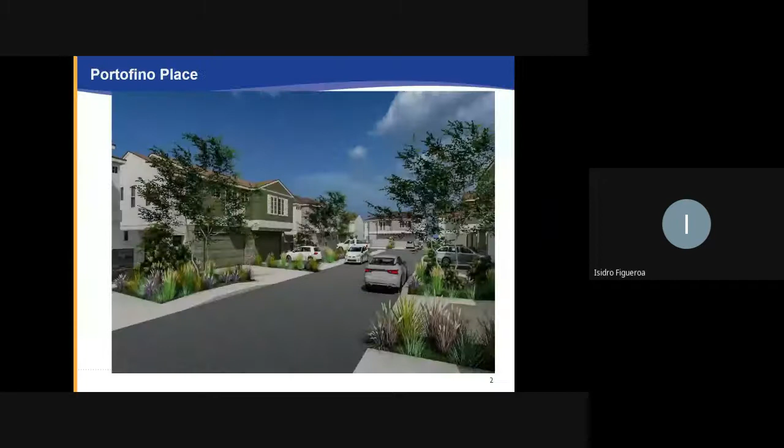The project requires approval of a general plan amendment to change the land use designation of the project site from Business Research Park to Residential Medium. The RM land use designation allows density up to 12 to 18 units per acre.

The project is seeking approval of a zone change to change the zoning of the project site from Business Research Park to Multiple Family R2. The R2 zoning allows condominium development with a tentative subdivision map and special use permit approval.

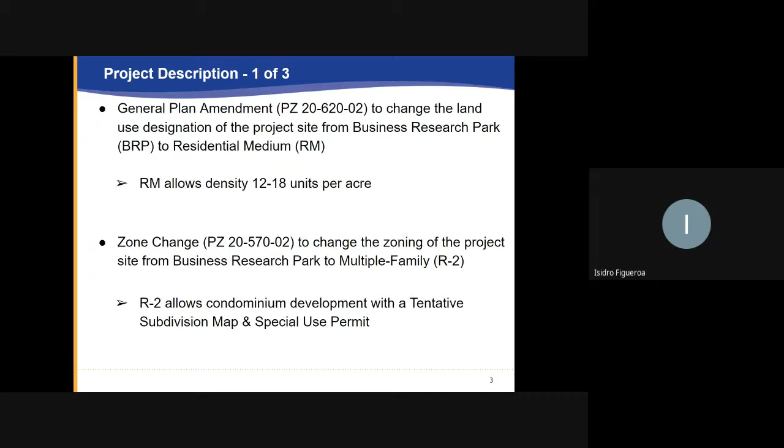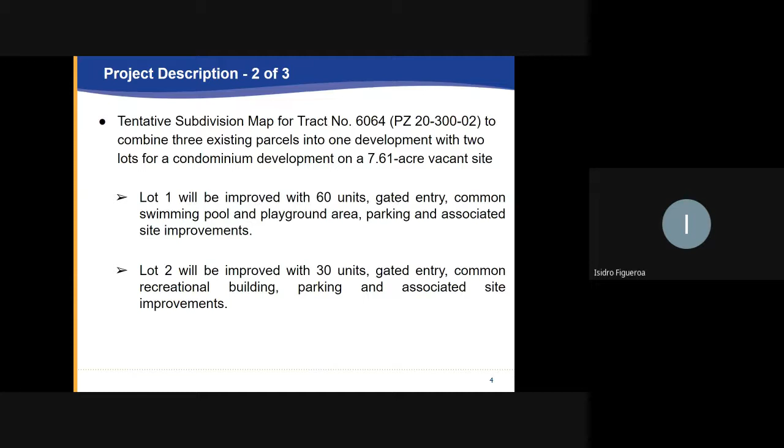The project is seeking approval of a tentative subdivision map for tract number 6064 to combine three existing parcels into one development with two lots for a condominium development on a 7.61 acre site. Lot 1 will be improved with 60 units, gated entry, common swimming pool and playground area, parking, and associated site improvements. Lot 2 will be improved with 30 units, gated entry, common recreational building, parking, and associated site improvements.

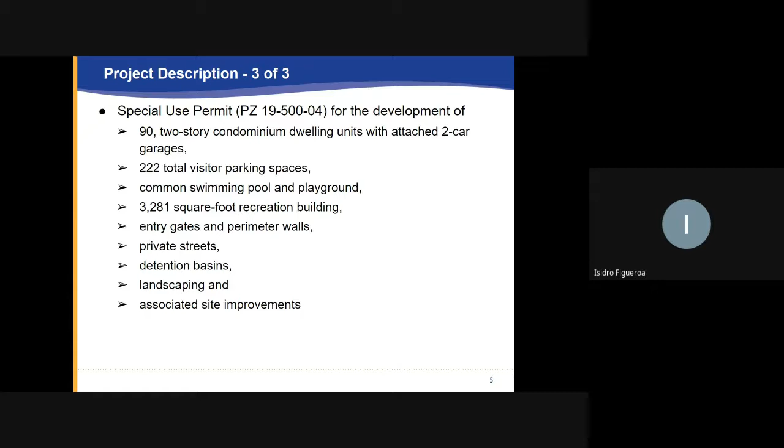The project is seeking approval of a special use permit for the development of 90 two-story condominium dwelling units with attached two-car garages, 222 visitor parking spaces, common swimming pool and playground areas, a 3,281 square foot recreational building, entry gates, private streets, landscaping, detention basins, and associated site improvements.

The project site is located on the south side of 5th Street at the intersection of Portofino Place within the Sea View Estates neighborhood. The Oxnard Airport and industrial uses are located to the north of the project site. Residential subdivisions are located to the south. A car wash is located to the west, and an elementary school is located to the east.

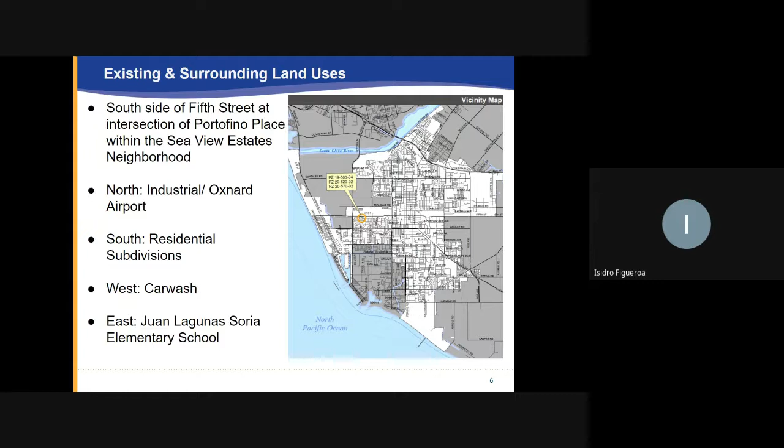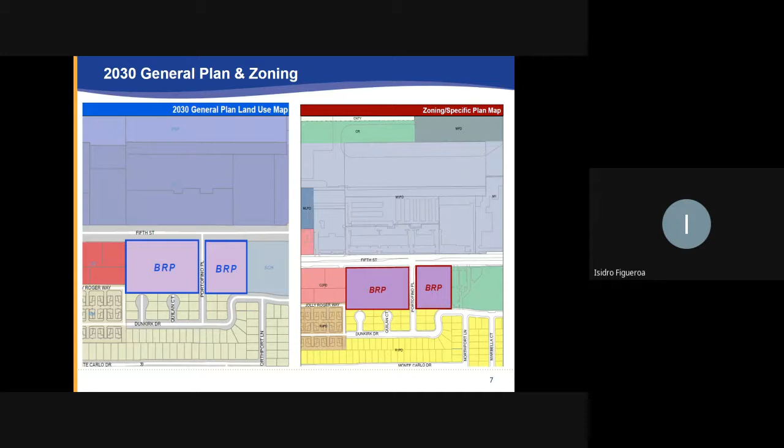The existing 2030 general plan land use designation for the project site is Business Research Park, and the existing zoning of the project site is also Business Research Park.

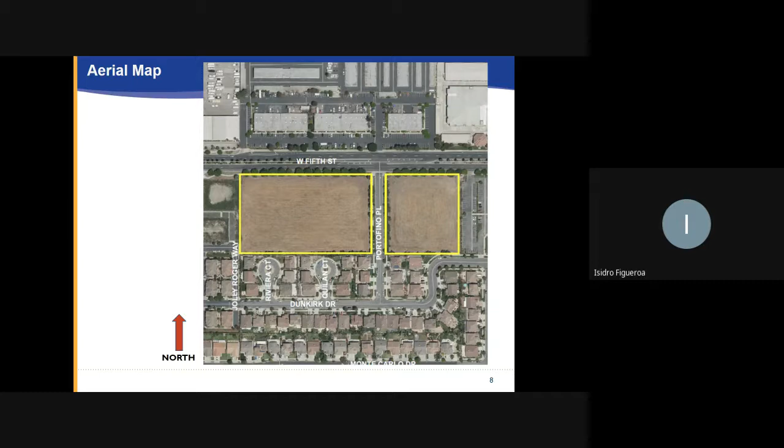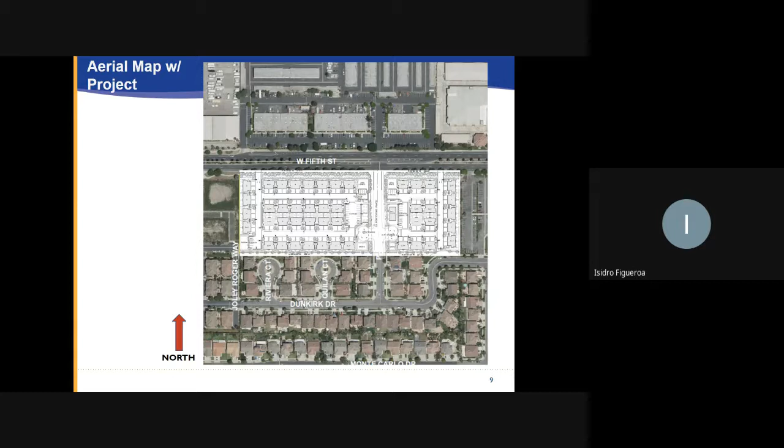Providing some background, the project site was part of a larger 17-acre project that has been developed in phases. In 2004, the council approved the general plan amendment and zone change to designate 7.885 acres of the 17-acre project as residential, located north and directly adjacent to the project site. The project site was to be changed to be inclusive of three parcels zoned Commercial General through a separate application, but the applicant did not proceed and the site remained BRP.

A mitigated negative declaration was found to be appropriate and adopted by the City Council. The adopted MND found the project not to have a significant impact to the environment if the mitigation measures described in the MND were incorporated into the project.

On March 19, 2019, the City Council reviewed a pre-application for the project site that includes all of the components this project is requesting. The City Council reviewed and made general comments on the pre-application. The Council found the general plan amendment and zone change request for a residential project generally acceptable, and preferred affordable housing units built on site.

The Council discussed the need to update the affordable housing in-lieu fee payment because of the low payment amount. In general, the Council did not prefer an affordable housing in-lieu fee payment option for residential projects until the affordable housing in-lieu fee payment was updated.

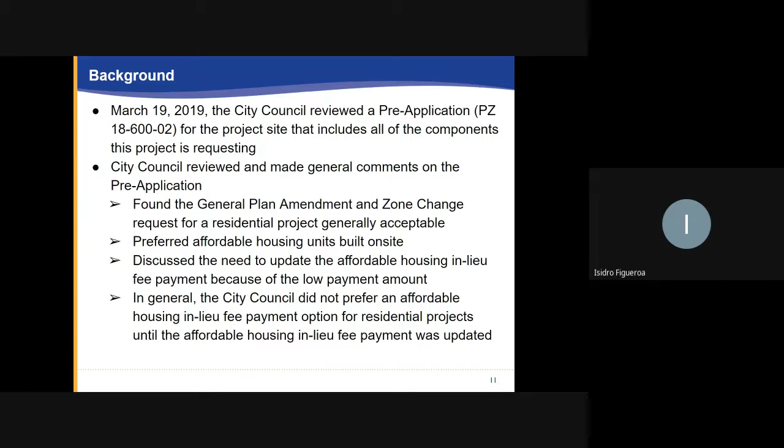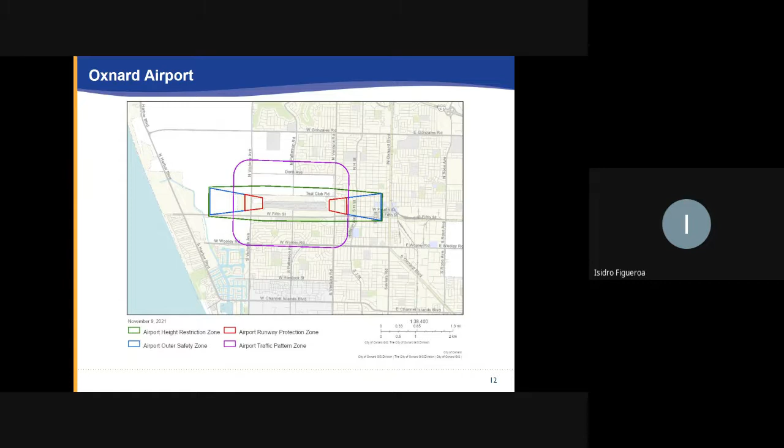The project site is located within the Oxnard Airport sphere of influence and height restriction zone. Since the project site is located within the Oxnard Airport sphere of influence and restrictive height zone, it limits the structural coverage to 25% and requires that total height of buildings not exceed 25 feet. The project is designed not to exceed the 25% allowable site coverage and 25 feet maximum height limit.

The project is required to implement mitigation measures G2 and K1 of the addendum to avoid conflicts with airport compatibility requirements by providing necessary buffers as well as filing with and undergoing review by the Federal Aviation Administration.

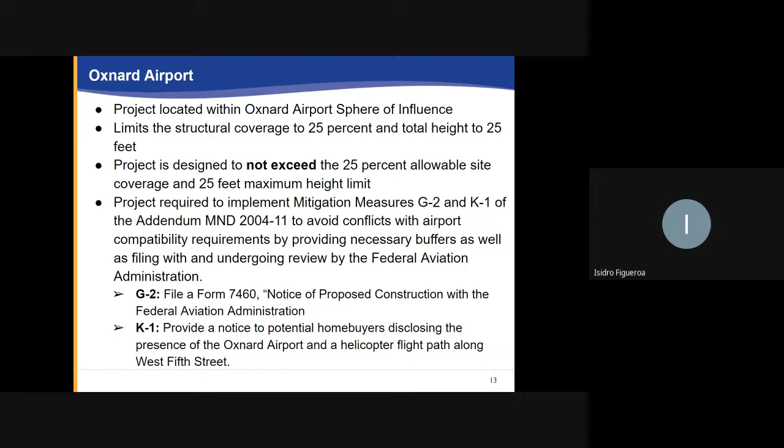The two mitigation measures are G2, file a Form 7460 Notice of Proposed Construction with the Federal Aviation Administration, and K1, providing notice to potential homebuyers disclosing the presence of the Oxnard Airport and a helicopter flight path along West Fifth Street. Both of these mitigation measures will be incorporated into the special use permit and tentative tract map resolutions.

The general plan amendment request is to change the general land use designation from business research park to residential medium to allow for a residential project.

The project site is located on Fifth Street, a designated scenic corridor, and it shall incorporate a required 30-foot landscaping buffer. The project as designed complies with the new RM land use designation.

The RM allows density of 12 to 18 units per acre. The project is proposing 12 units per acre. The project is designed to meet the 2030 general plan residential policies.

The project is designed not to exceed the 25% allowable site coverage, and structures are designed not to exceed 25 feet of height, consistent with the Oxnard Airport Sphere of Influence restrictive zone.

The project will be served by existing utilities with minimal impacts on city infrastructure and services. The amendment will not create internal inconsistencies with the 2030 general plan.

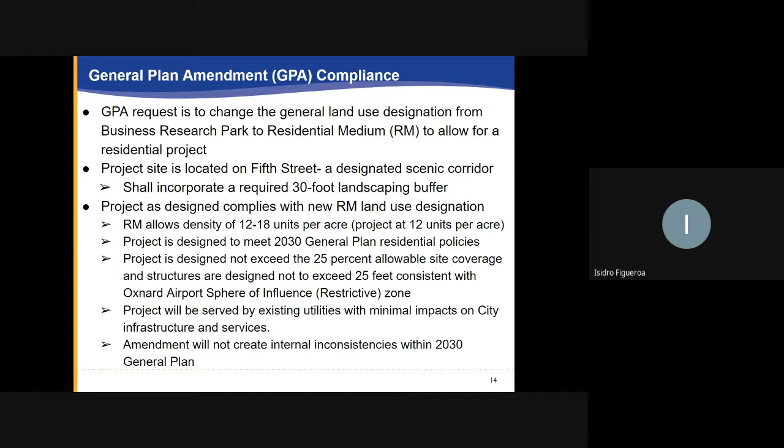The general plan amendment requests a change from business and research park to residential medium for the project site.

The project is seeking approval of a zone change, requesting changing zoning from BRP to residential multifamily for the project site, to be consistent with the general plan amendment request.

The project has been designed to meet the R2 development standards, which include providing attached two-car garages to all units.

Density allows for up to 94 units, but the project proposes 90. The project provides 222 parking spaces, although it only is required to provide 60.

The project exceeds the interior yard space requirement of 30% with 34%, which equates to 115,660 square feet. The requirement is 30%, which equates to 96,572 square feet.

All structures are designed not to exceed 2 stories and 25 feet. The project is designed to meet all required setbacks, including the 30-foot landscaping buffer required by the general plan in front of Fifth Street. The project is conditioned to provide 12 bicycle parking spaces.

The project is not required to comply with the attached dwelling unit development standards.

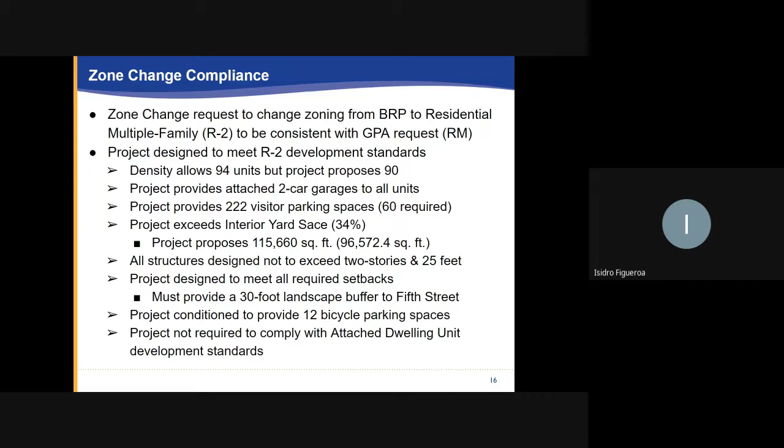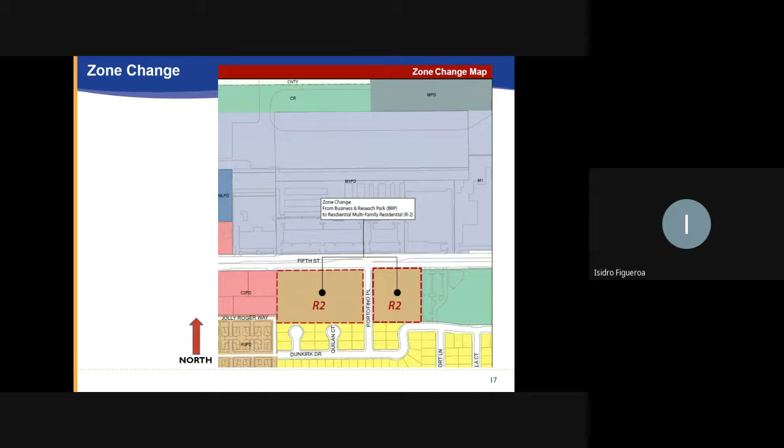The project is proposing a zone change to change the zoning of the project site from business and research park to residential multiple family residential, R2.

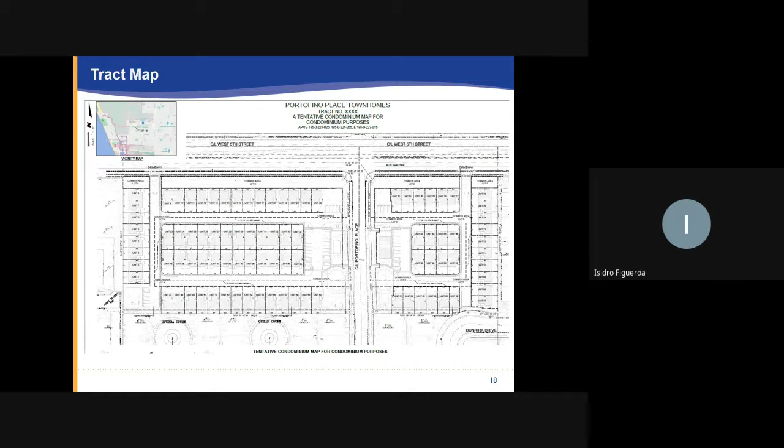The project is seeking approval of a tract map for condominium purposes and infrastructure improvements. The existing project site is bisected by Portofino Place.

The project conforms to parking requirements by providing 2-car attached garages, required for a total of 180 spaces. The project is required to provide 60 visitor parking spaces; however, the project is proposing 222 spaces.

There will be no parking allowed on the private streets, and a condition of approval is included in the special use permit resolution. The project is accessed by Fifth Street.

Each lot will have a gated entry off of Fifth Street. Each lot has a gated entry off of Portofino Place.

The addendum to MND 2004-11 analyzed vehicle miles traveled as required by the California Environmental Quality Act. In comparison, the proposed project will have significantly less VMT annually than a commercial project.

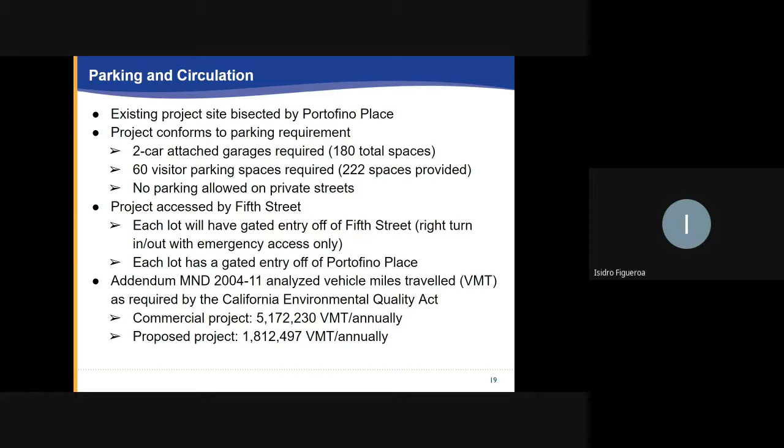The proposed project would encompass 1,812,497 VMTs versus the commercial project at 5,172,230 VMT.

Fifth Street westbound traffic would utilize the existing dedicated left turn pocket to access Portofino Place. Eastbound traffic on Fifth Street will be able to access the project site.

The project is conditioned to provide off-site improvements such as pedestrian safety enhancement along Fifth Street by retrofitting existing streetlights along the project frontage with LED lights, constructing 2 traffic calming devices on Portofino Place, and all internal drive aisles shall be designed and maintained as fire lanes for parking, regulatory, and enforcement purposes.

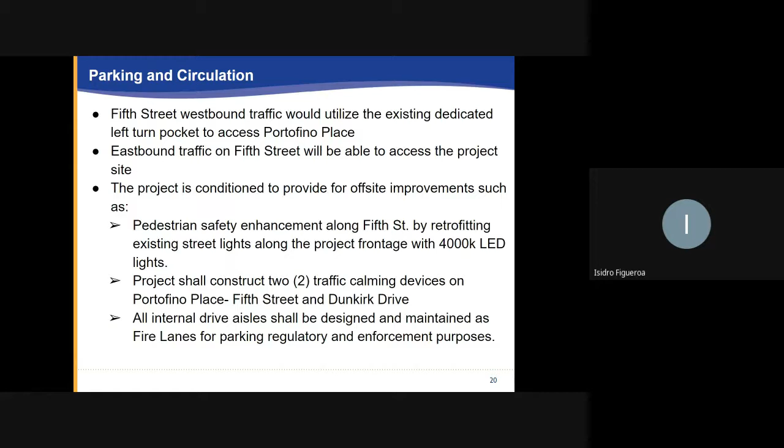The project is designed based on existing project site configuration with no request for any variances. The existing project site is bisected by Portofino Place. Access points access off of West 5th Street. Parking is all contained within lots and screened by property line, walls, and landscaping.

A 30-foot landscaping buffer required along 5th Street frontage is incorporated into the project. Architecture and landscaping is similar to surrounding communities. The project's density is similar to surrounding communities as well, and the project will be governed as a single entity by a homeowners association, and all amenities will be available to residents of both lots.

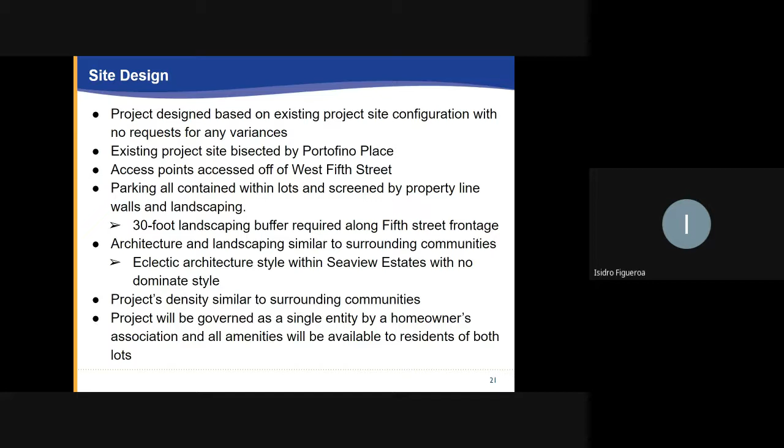Again, the project was designed based on the existing lot configuration. Two main entry points will be off of Portofino Place, and the project incorporates a 30-foot landscaping buffer fronting 5th Street.

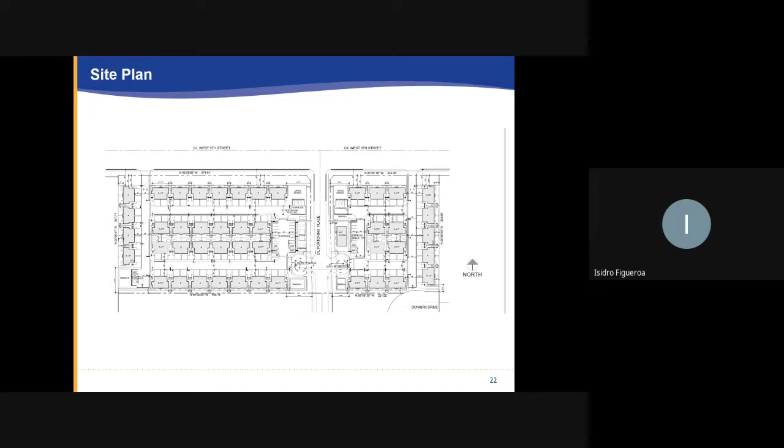The project complies with all but one of the advisory standards identified under City Council Resolution number 7658. The outdoor patio required dimensions, which are advisory, are 10 feet by 10 feet, equating to 100 square feet of land area. The project provides individual outdoor patio areas with various dimensions, with some designed under the 10 foot by 10 foot recommended by the advisory standards. However, these individual outdoor patio areas range in land area between 450 to 1,530 square feet, which exceed the 100 square foot recommended by the advisory standards.

The project has been designed to integrate other advisory standards, such as providing common areas like the common swimming pool, playground, and the 3,281 square foot recreational building, including storage contained outside of the required garage dimensions.

Minimum livable area is recommended at 1,000 square feet. However, the project proposes livable area between 1,413 to 1,476 square feet. The advisory standards recommend security, and the project has incorporated a gated community and secure entrances.

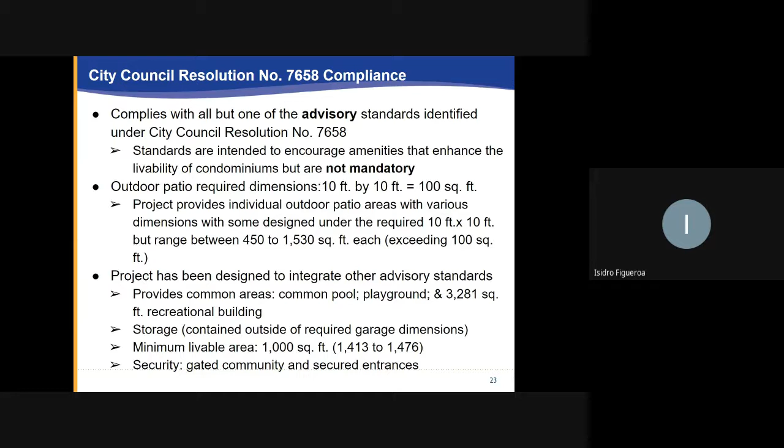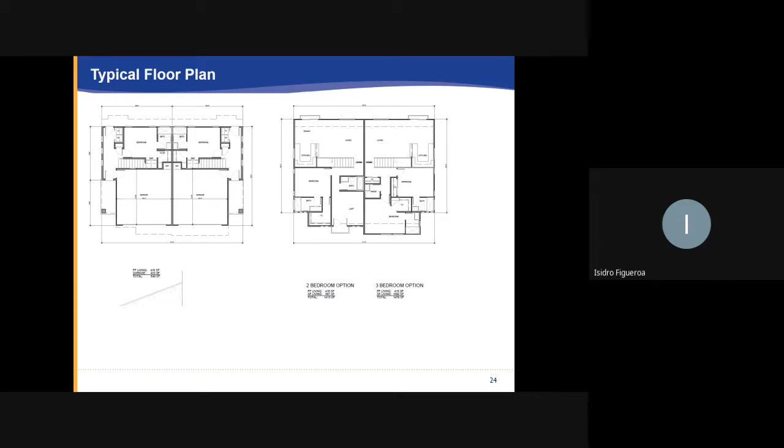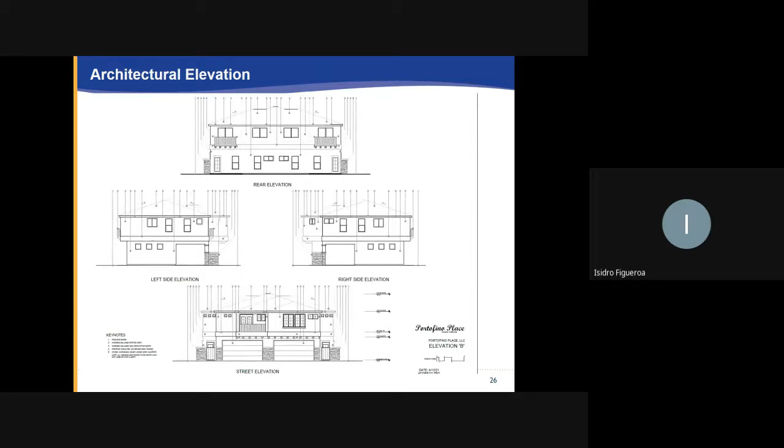The floor plan currently on display shows a typical floor plan for the project site. The project will offer 6 different unit types ranging in square footage between 1,441 and 1,508 square feet, offering options of 2 to 3 bedrooms, with architectural elevations being offered throughout the project site, which incorporate craftsman style architectural elements.

The landscaping, again, requires that the project site incorporate a 30-foot landscaping buffer along the frontage of the project site, parallel to 5th Street. That has dictated the design and placement of structures along the project site.

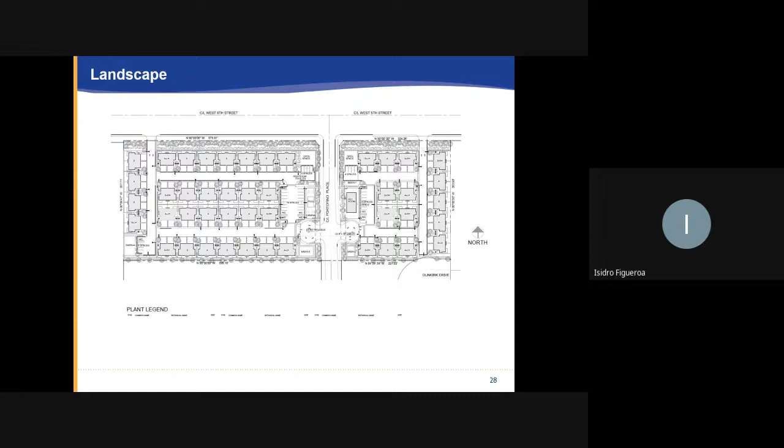The project is required to provide 30% interior yard space, which equates to 96,572 square feet. The project provides approximately 115,660 square feet. The project is not proposing to remove any of the 91 existing trees on site. The project provides an additional 152 trees.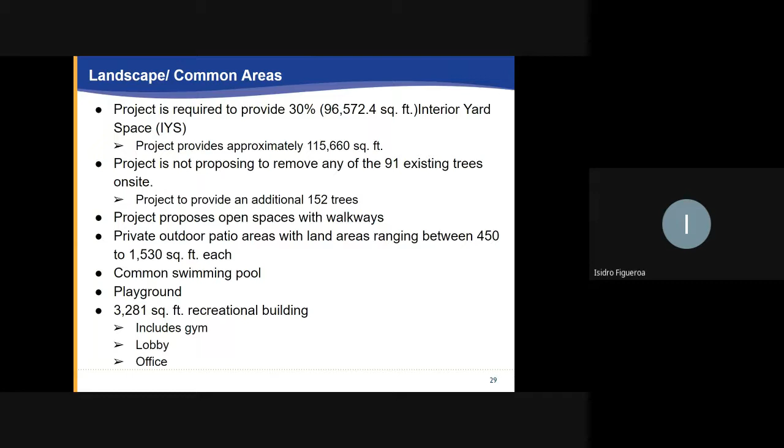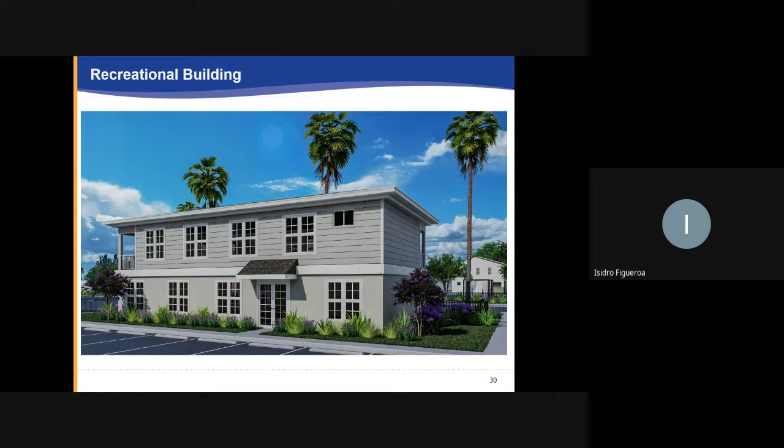The project proposes open spaces with walkways, private outdoor patio areas with land areas ranging between 450 to 1,530 square feet, common swimming pool and playground areas, and a 3,281 square foot recreational building, which includes a gym, lobby, and office. The elevation currently on display illustrates the architectural style of the recreational building, which is to complement the existing architectural style of the condominium units.

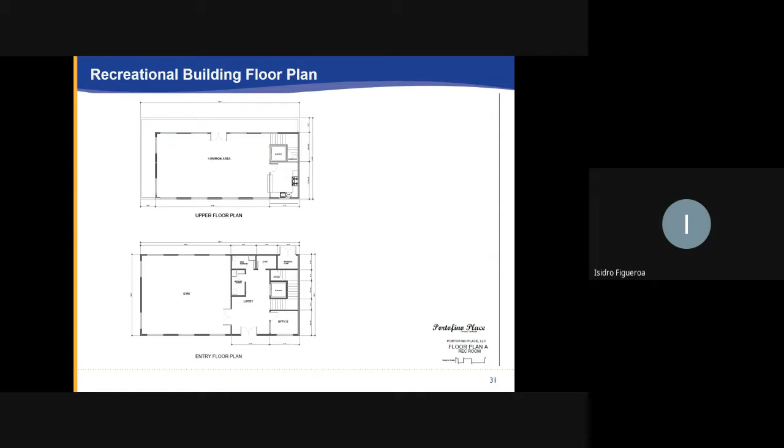In 2004, an MND was prepared to evaluate the commercial development on the project site, which required a general plan amendment, zone change, and the residential development on the adjacent 10-acre property to the south of the site. The project site was not identified in the list of hazardous and cleanup sites. The project site was found to be suitable for commercial development. The 10-acre adjoining site was found suitable for residential development.

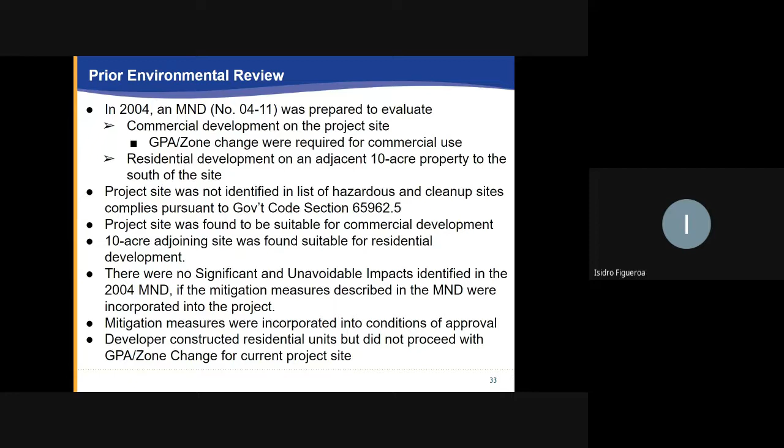There were no significant and unavoidable impacts identified in the 2004 MND if all mitigation measures described in the MND were incorporated into the project. Mitigation measures were incorporated into conditions of approval for the project. However, the developer constructed the residential units but did not proceed with the general plan amendment zone change for the current project site. An addendum to MND 2004-11 was prepared.

The addendum compares the environmental effects of the current proposed project to the effects of the original project. The residential project being considered by the Planning Commission is a less intensive use than the commercial project analyzed in the previous MND because of less traffic volume. The addendum concludes that the proposed project would not create any new significant impacts or increase the severity of the impacts beyond those identified in the previously adopted MND 2004-11.

No new significant effects identified. All mitigation measures included in adopted MND 2004-11 and the addendum to MND 2004-11 have been included as conditions of approval in the special use permit and tentative tract map resolutions.

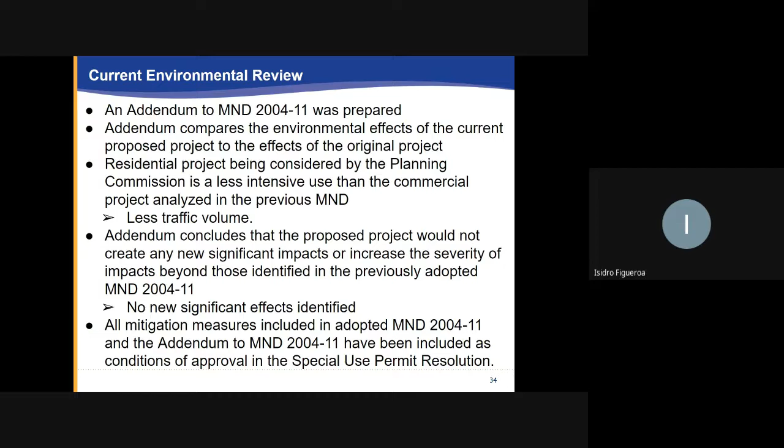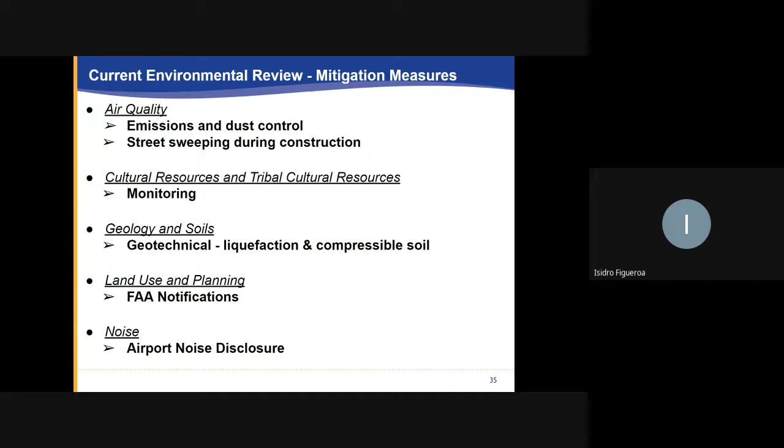The topics analyzed under the MND and addendum MND that require mitigation measures have been included on this slide for a quick summary. Air quality mitigation measures include emissions and dust control, street sweeping during construction. For cultural resources and tribal cultural resources, monitoring. For land use and planning, FAA notifications. For noise, airport noise disclosure.

Inclusionary ordinance number 2980 requires the project to set aside 10% of the units as affordable to low-income households as defined in the California Health and Safety Code section 50079.5. The project will include the required 9 affordable units, or 10% of the total units on site. The project has been conditioned to offer rent or sell to households with annual incomes at or below 50% of the annual median income for Ventura County.

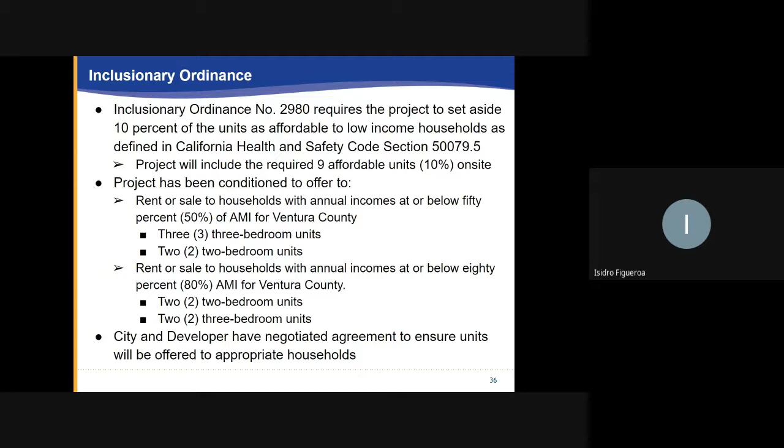AMI: 3 three-bedroom units, 2 two-bedroom units. Rent or sell to households with annual incomes at or below 80% AMI for Ventura County: 2 two-bedroom units, 2 three-bedroom units. City and developer have negotiated an agreement to ensure units will be offered to appropriate households.

On April 20th, 2020, the project was presented at the community workshop. All property owners within the Seaview estates were mailed notices of the community workshop meeting. The project was presented at the meeting, and public comments focused on traffic along 5th Street, traffic generated by the nearby school during drop-off and pickup times, the traffic signal at the intersection of 5th Street and Portofino Place, airport proximity, and additional traffic to Dunkirk Drive.

Staff received a petition critical of the project from a member of the community, which has been included in the staff report.

There are a few key conditions to be highlighted for the tentative tract map. One condition will align the 36-month expiration date to the City Council zone change effective date. The establishment of a homeowners association, ensuring inclusionary housing measures, and also assuring or including mitigation measures identified within the addendum to the MND, fee collection, landscaping, and driveways connecting to Fifth Street.

Key conditions highlighted in the special use permit: again, a condition aligning the 36-month expiration date to the City Council zone change effective date, landscaping and water conservation conditions of approval, and conditions of approval identifying fire and police requirements, a condition addressing fiber optics, and construction quality.

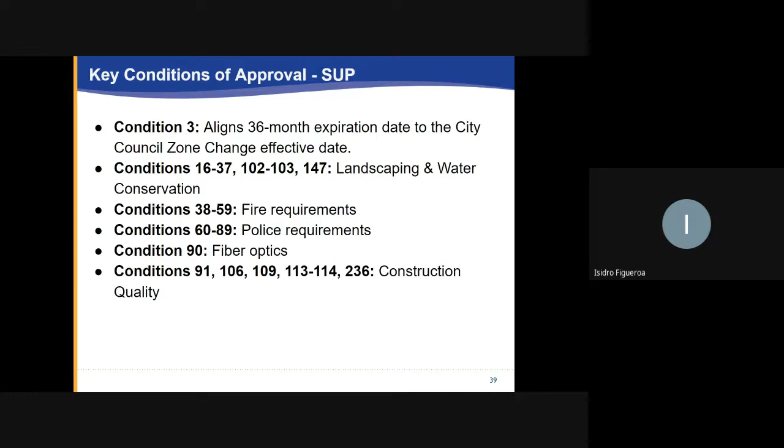Additional conditions to highlight in the special use permit resolution are conditions addressing fee collection, inclusionary housing, ensuring that the mitigation measures are included for the addendum in the SUP resolution, conditions addressing the airport proximity, and driveways connecting to Fifth Street.

Planning Commission renders a decision on the special use permit request in accordance with Oxnard Municipal Code Section 16-544. The Planning Commission's actions on the special use permit for the 90-unit condominium development may be appealed to the City Council within 18 days after the decision date.

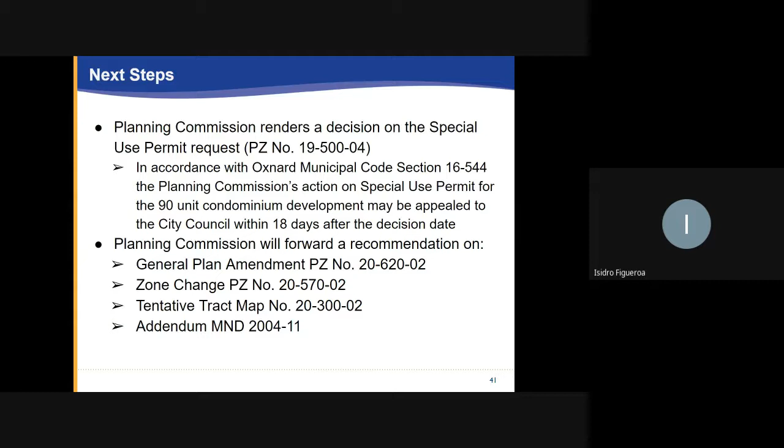Planning Commission will forward a recommendation on General Plan Amendment PZ number 20-620-02, Zone Change PZ number 20-570-02, Tentative Tract Map number 20-300-02, and Addendum to MND 2004-11.

Staff recommends that the Planning Commission adopt a resolution recommending that the City Council adopt an addendum to mitigated negative declaration 2004-11, and adopt a resolution recommending that the City Council approve planning and zoning permit number 20-620-02 to change the land use designation of the project site from business research park to residential medium, and adopt a resolution recommending that the City Council approve planning and zoning permit number 20-570-02 to change the zoning of the project site from business research park to multiple family R2.

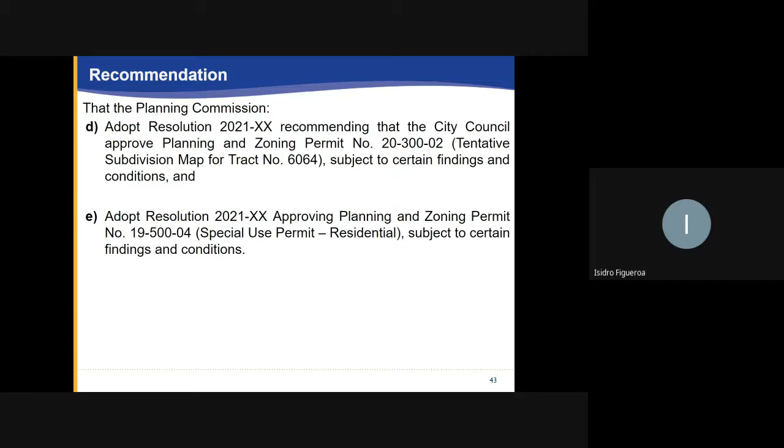To adopt a resolution recommending that the City Council approve planning and zoning permit number 20-300-02, subject to certain findings and conditions, and adopt a resolution approving planning and zoning permit number 19-500-04, subject to certain findings and conditions. Staff, encompassing the Community Development Department, Engineering, Traffic and Transportation, and the City Attorney's Office, the environmental consultant Rincon Consultants, and the applicant's team are available for any questions. This concludes staff's presentation. Thank you.